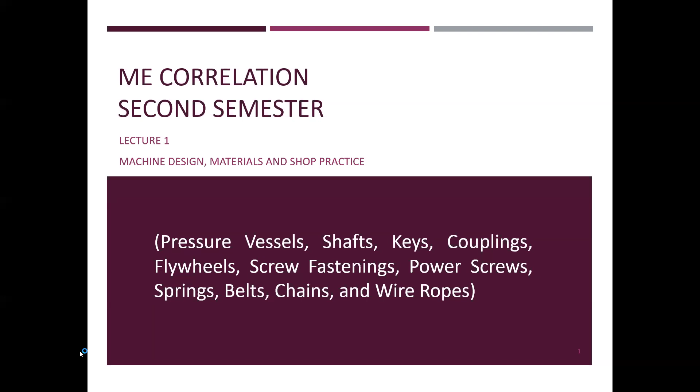So let's discuss pressure vessels or cylinders. We have thin wall pressure vessel or thin wall cylinder, which is one whose plate thickness is small compared to the diameter of the vessel. The ratio T over DI is equal to or less than 0.1, where T is thickness and D is diameter.

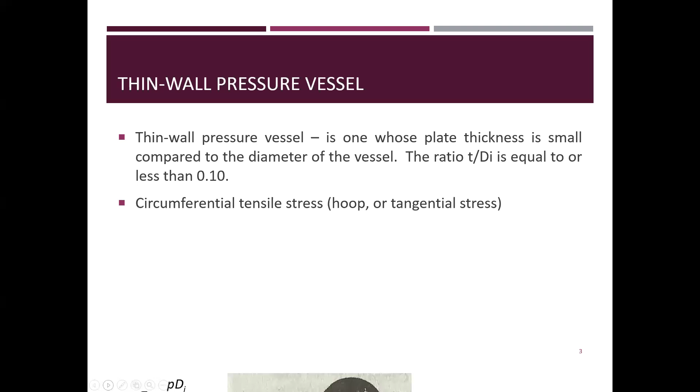So circumferential tensile stress, also called hoop or tangential stress, sigma T, is equal to PDI over 2T. That's shown in the figure.

Next is the longitudinal tensile stress. For thin wall cylinder and thin wall sphere, sigma L is equal to PDI over 4T, where sigma T is the circumferential stress in PSI, sigma L is the longitudinal stress in PSI, P is the internal pressure in PSI, DI is the internal diameter in inches, and T is the wall thickness in inches. SI units also apply.

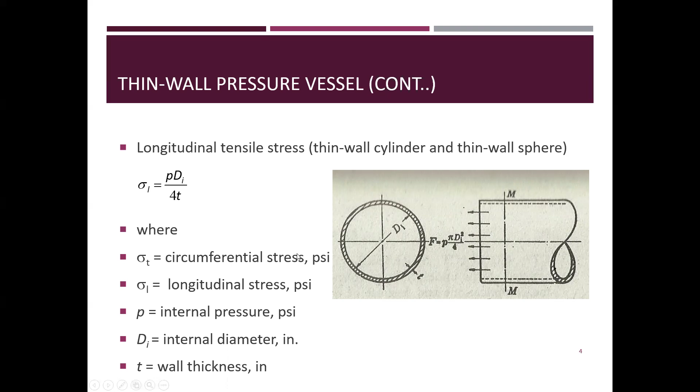Joint efficiency or relative strength, N, is equal to the minimum strength of joint divided by the strength of solid plate. Then, considering joint efficiency, the circumferential tensile stress now, sigma T, is equal to PDI over 2TN, and longitudinal tensile stress, sigma L, is equal to PDI over 4TN.

Factor of safety on specified material strength is taken as 5.

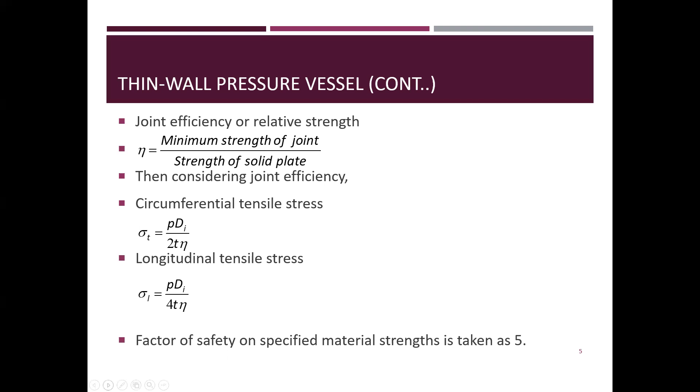Example number 1: Design a vertical steel cylindrical water tank 30 meters in diameter and 45 meters high. Consider the pressure variation in the water to follow a straight line from the edge of the top to the center of the bottom, and the allowable stress of the steel plate is 120 megapascal. Without reinforcing angle bars and rod, find the thickness of the steel plate.

ME Board, October 2006. So the solution is P is equal to gamma times H. Let's get the pressure at the bottom: P is equal to gamma H, which is 9.81 kilonewton per cubic meter times 45 meters, giving 441.45 kilopascal. So we have the pressure.

So sigma T is equal to PDI over 2T, which is 120,000 equals 441.45 times 30 over 2T. So the thickness is 0.055 meters. That's the thickness of the wall of the cylinder.

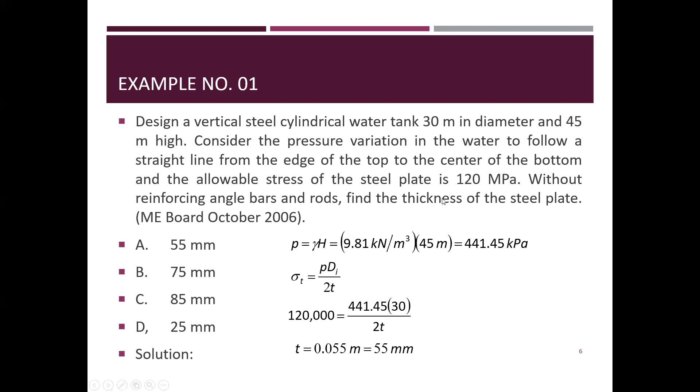Now, thick wall cylinder is one whose plate thickness is large compared to the diameter of the vessel. The ratio T over DI is greater than 0.1.

Here are the equations. Using Lame's formula, the tangential stress sigma T is equal to PI times R sub I squared minus P sub O times R sub O squared, plus R sub I squared times R sub O squared times (PI minus PO) over R squared, all divided by R sub O squared minus R sub I squared.

So the radial stress sigma R is equal to PI times R sub I squared minus P sub O times R sub O squared, minus R sub I squared times R sub O squared times (PI minus PO) over R squared, all divided by R sub O squared minus R sub I squared.

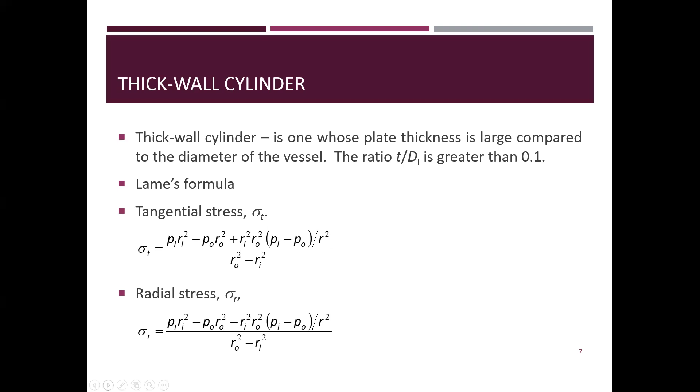Where R sub O is the outer radius of the cylinder in inches, R sub I is the inner radius of the cylinder in inches, PI and PO are the internal and external pressure respectively in PSI, T is the wall thickness equal to R sub O minus R sub I, sigma T is the tangential stress in PSI, and sigma R is the radial stress in PSI. SI units also apply.

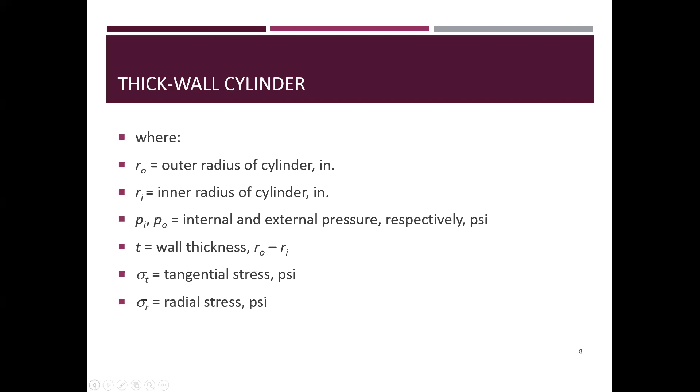Now, the maximum tangential stress at the inside: sigma T is equal to P sub I times (R sub O squared plus R sub I squared) minus 2 P sub O times R sub O squared, over R sub O squared minus R sub I squared.

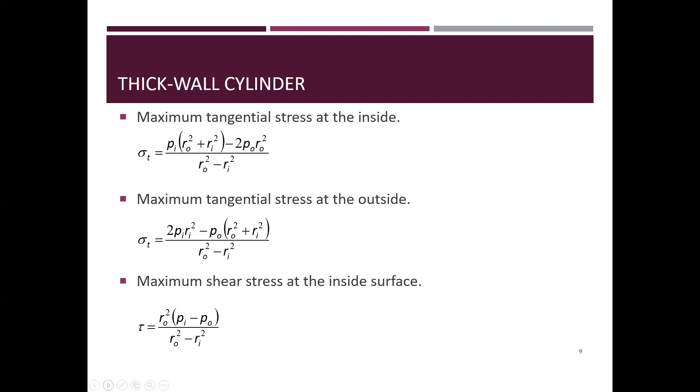Maximum tangential stress at the outside: sigma T is equal to 2 P sub I times R sub I squared minus P sub O times (R sub O squared plus R sub I squared), over R sub O squared minus R sub I squared. And the maximum shear stress at the inside surface, tau, is equal to R sub O squared times (P sub I minus P sub O) over R sub O squared minus R sub I squared.

Tangential and radial stress with zero value for the external pressure. Sigma T is equal to P sub I R sub I squared over R sub O squared minus R sub I squared, plus 1 plus R sub O squared over R squared. Sigma R is equal to P sub I R sub I squared over R sub O squared minus R sub I squared, plus 1 minus R sub O squared over R squared.

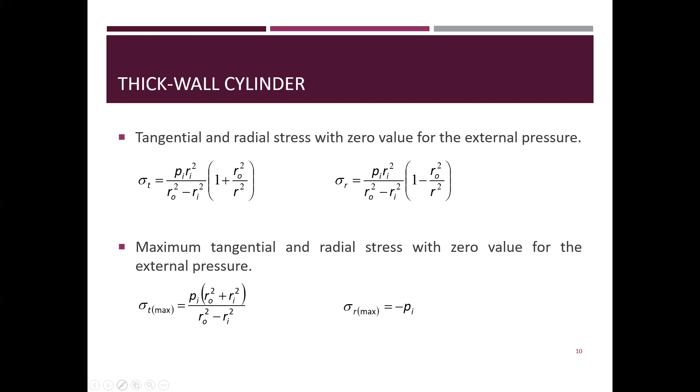For the maximum tangential stress and radial stress with zero value for the external pressure, sigma T maximum is P sub I times R sub O squared plus R sub I squared over R sub O squared minus R sub I squared. The sigma R maximum is negative P sub I. So these are the symbols.

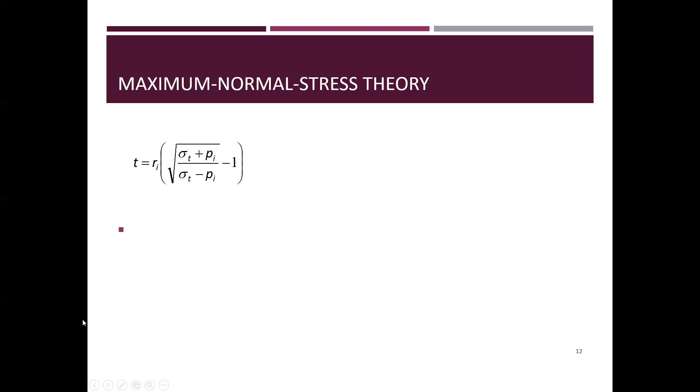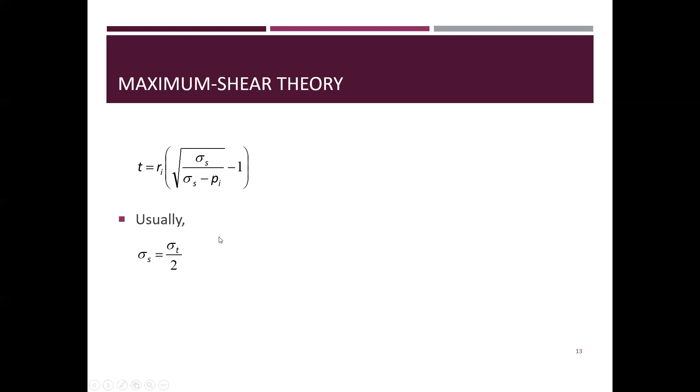Maximum shear theory, T is equal to R sub I times the square root of sigma S over sigma S minus P sub I, then minus 1, outside the square root. Usually, sigma S is equal to sigma T over 2. The application of this was probably discussed in your machine design course as well.

Maximum strain theory. Here comes Birnie's equation for open-end cylinder. We're just reviewing this, the complete discussion is of course in machine design. T is equal to R sub I times the square root of sigma T plus 1 minus mu times P sub I over sigma T minus 1 plus mu P sub I, then minus 1.

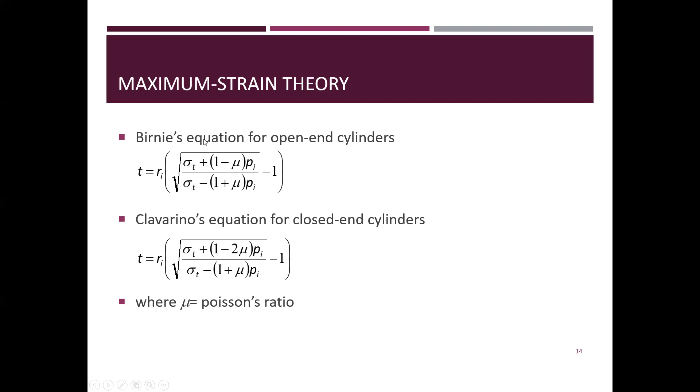Clavarino's equation for closed-end cylinder. T is equal to R sub I times the square root of sigma T plus 1 minus 2 mu P sub I over sigma T minus 1 plus mu times P sub I, minus 1. Then minus 1. Mu is the Poisson's ratio. Remember this equation, okay.

Maximum energy of distortion theory, or the octahedral shear stress theory. T is equal to R sub I times the square root of sigma T over sigma T minus the square root of 3 times P sub I. This P sub I is outside the square root. Then minus 1, which is also outside the square root, not inside it.

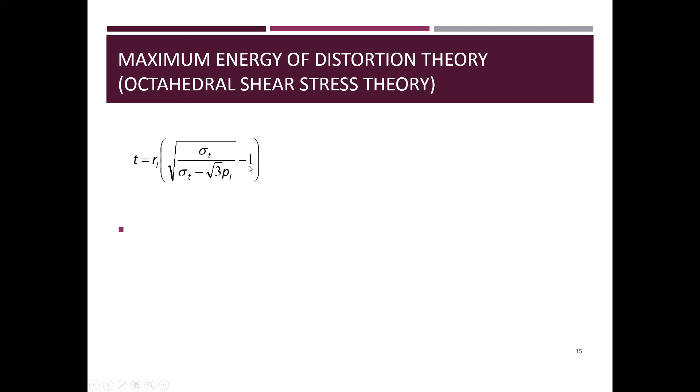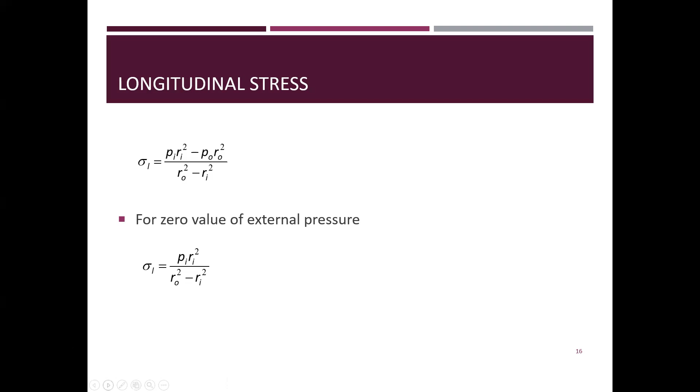Example number 2. The working cylinder of a hydraulic system is acted upon by a hydraulic pressure of 370 psi, while the maximum load on the piston is 5,500 pounds. If the allowable tensile stress is 2,000 psi, what is the required wall thickness of the cylinder? Solution: F is equal to P over A.

Pressure times area gives you the force. So, 5,500 is equal to 370 times pi over 4 D squared. We don't have the diameter, so we solve for it. D is equal to 4.35 inches.

Assuming a thick wall cylinder, then we check if it's valid. T is equal to D over 2 times, for steel, right, steel, for this hydraulic system, D over 2 times the square root of sigma T plus P sub I over sigma T minus P sub I, then minus 1. T is equal to 4.35 over 2 times the square root of 2,000 plus 370 over 2,000 minus 370, then minus 1, which equals 0.448.

To check, T over D is 0.448 over 4.35, which is 0.103. That's greater than 0.1, so it's a thick cylinder. A thin cylinder is an approximation of a thick cylinder with T over D less than 0.1. Using the thin cylinder equation, this yields 0.402 inch with T over D of 0.092, which is less than 0.1. But this is valid only if the thick cylinder equation's T over D is less than 0.1.

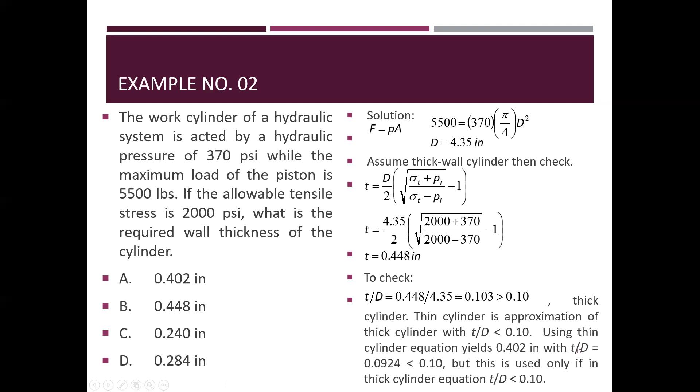So next is shafting. Shafts. Shafts subjected to twisting moment only. T over J is equal to tau over R, where T is equal to twisting moment or torque acting upon the shaft, J is the polar moment of inertia of the shaft about the axis of rotation, tau is the torsional shear stress, and R is equal to D over 2, where D is the diameter of the shaft. This is just for review; the detailed discussion will be next time.

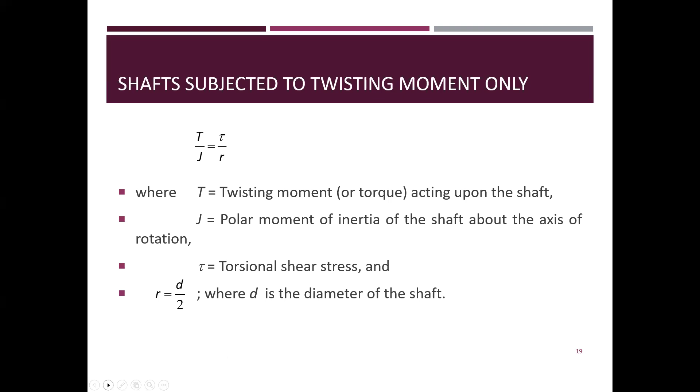For solid shaft, J is equal to pi over 32 times D exponent 4. For hollow shaft, J is equal to pi over 32 times D sub O exponent 4 minus D sub I exponent 4. For solid shaft, T is equal to pi over 16 times tau times D cube. For hollow shaft, T is equal to pi over 16 times tau times D sub O exponent 4 minus D sub I exponent 4, over D sub O.

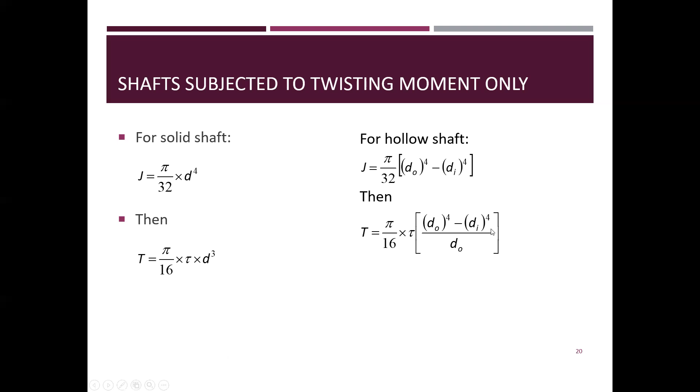Example number 3: A 4-inch shaft with a 2-inch hole through it has a weight 25% less than a solid 4-inch shaft. But its strength is decreased by what approximate percentage? So the percentage reduction is T sub S minus T sub hollow, over T sub S, multiplied by 100% since the question asks for percentage.

S subscript S is for solid, H is for hollow. So T sub S is equal to tau pi D cube over 16. T sub H is equal to tau pi times D sub O exponent 4 minus D sub I exponent 4, over 16 D sub O. Then we equate that.

So the formula for percent reduction: substitute D cube, cancel the tau and the pi and the 16. So D cube minus D sub O exponent 4 minus D sub I exponent 4 over D sub O, all over D cube, times 100%. This equals 1 minus D sub O exponent 4 minus D sub I exponent 4 over D sub O D cube, times 100%. Percent reduction is, substitute now the values, 1 minus 4 exponent 4.

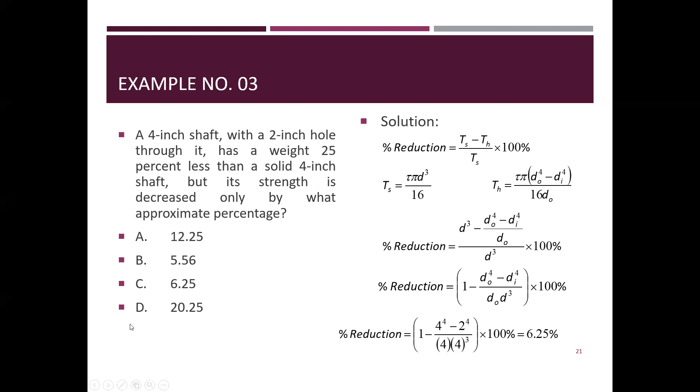Why the 1? Because 1 cube is 1. 1 minus 4 exponent 4 minus 2 exponent 4, over 4 times 4 cube, times 100%, equals 6.25%. So the answer is letter C. You may encounter problems like this on the board exam.

Shaft subjected to bending moment only. M over I is equal to sigma B over Y. This is the general equation, where M is the bending moment, I is the moment of inertia of the cross-sectional area of the shaft about the axis of rotation.

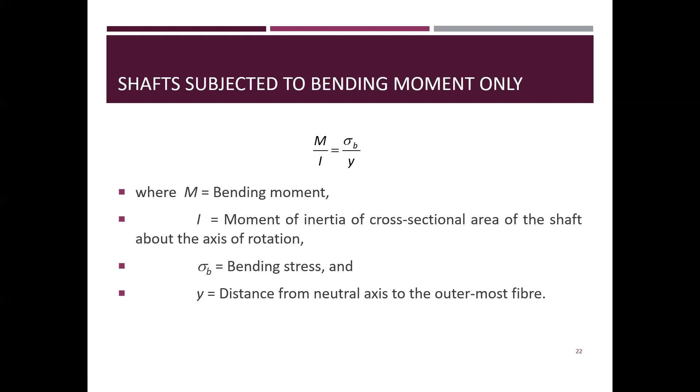Sigma B is the bending stress, and Y is the distance from the neutral axis to the outermost fiber. For a round shaft, I is equal to pi over 64 times D exponent 4, the moment of inertia, and Y is equal to D over 2. Then M is equal to pi over 32 times sigma B times D cube. For a hollow shaft, I is equal to pi over 64 times D sub O exponent 4 minus D sub I exponent 4. Then M is equal to pi over 16 times sigma B times D sub O exponent 4 minus D sub I exponent 4, over D sub O.

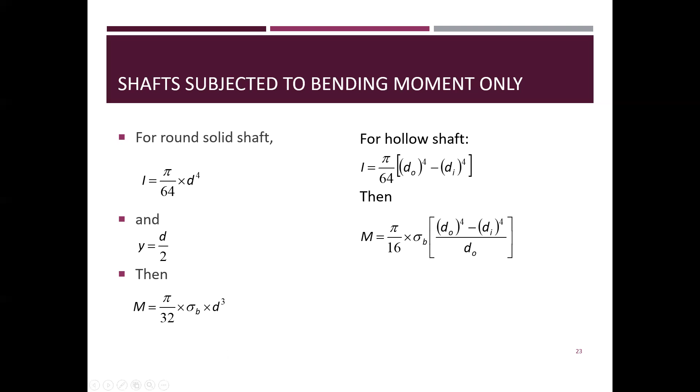Now for a shaft subjected to combined twisting moment and bending moment, we use the maximum shear stress theory, or Guest's theory. It is used for ductile materials such as mild steel. There is also the maximum normal stress theory, or Rankine theory, used for brittle materials such as cast iron.

So the maximum shear theory: tau max is equal to 1/2 of the square root of sigma B squared plus 4 tau squared. Tau max is 1/2 of the square root of 32M over pi D cube squared plus 4 times 16T over pi D cube squared, which simplifies to 16 over pi D cube times the square root of M squared plus T squared.

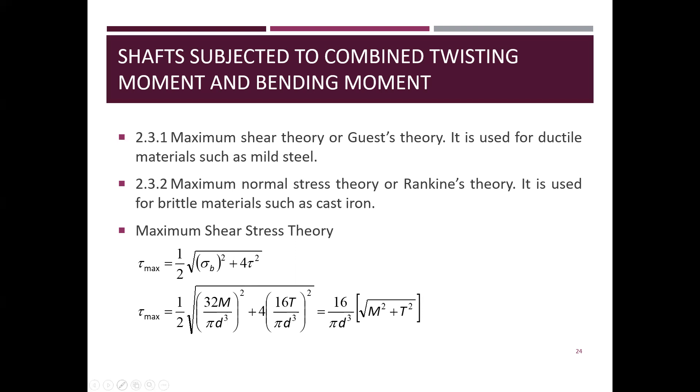So this becomes pi over 16 times tau max times D cube is equal to the square root of M squared plus T squared. This expression is called the equivalent twisting moment, denoted by T sub E.

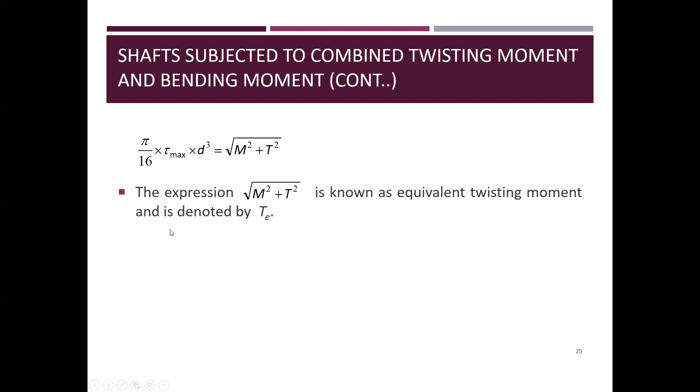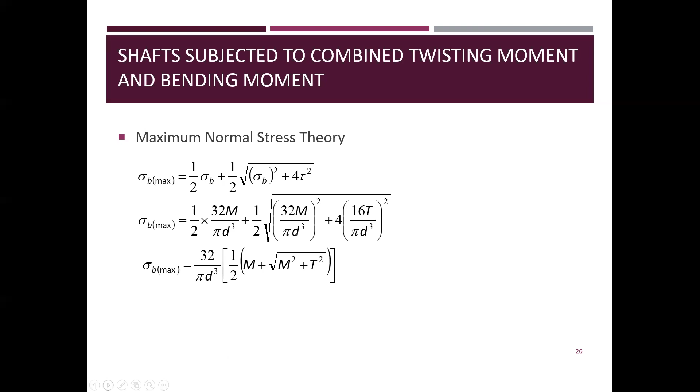Or 32 over pi d cubed times 1 half of m plus the square root of m squared plus t squared. So pi over 32 times sigma b max times d cube is 1 half of m plus the square root of m squared plus t squared.

The term 1 half m plus the square root of m squared plus t squared is known as the equivalent bending moment, denoted by m sub e.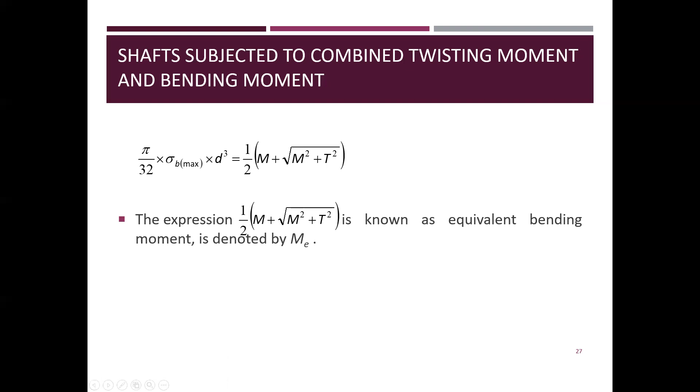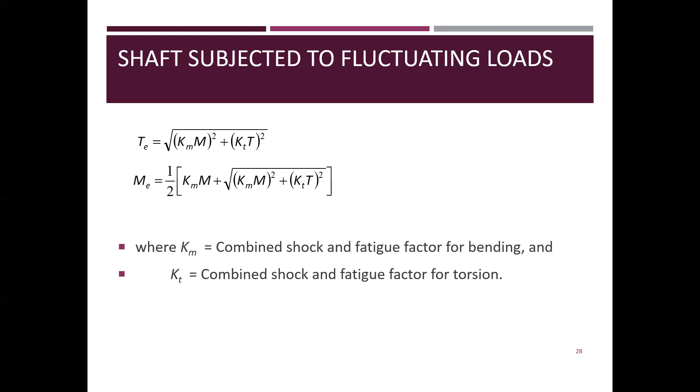Now, shaft subjected to fluctuating loads. TE is equal to the square root of Km M squared plus Kt T squared. Look at this formula: M is equal to 1 half of Km M plus the square root of m squared plus KTT squared, where Km is the combined shock and fatigue load factor for bending, and KT is the combined shock and fatigue factor for torsion.

From the design of machine elements by Faires: sigma es is equal to sigma ns over sigma ys, sigma ms plus kfs, sigma as over sf for torsion. Sigma E is equal to sigma n over sigma y, sigma m plus k sub f, sigma a over sf for bending.

Where sigma is the symbol for stress, and sf is the size factor or load factors. There are many factors there, already discussed before, right? That's the design, as in Faires.

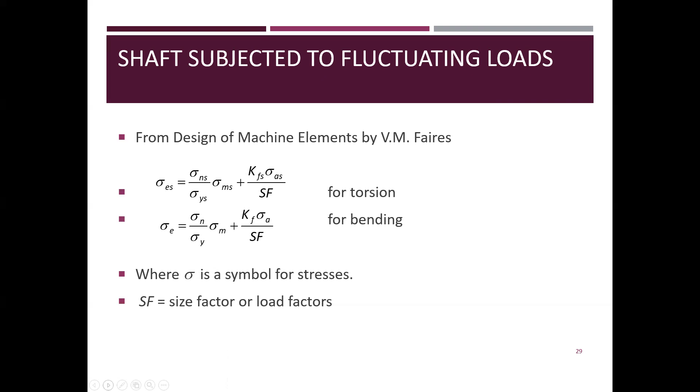Go back to that. Then the maximum shear theory: 1 over n is equal to sigma E over sigma n squared plus sigma ES over 0.5 sigma n squared, then square root or exponent 1 half. Von Mises-Hencky theory of failure, or octahedral shear theory, is 1 over n is equal to sigma E over sigma n squared plus sigma ES over 0.577 sigma n squared, exponent 1 half.

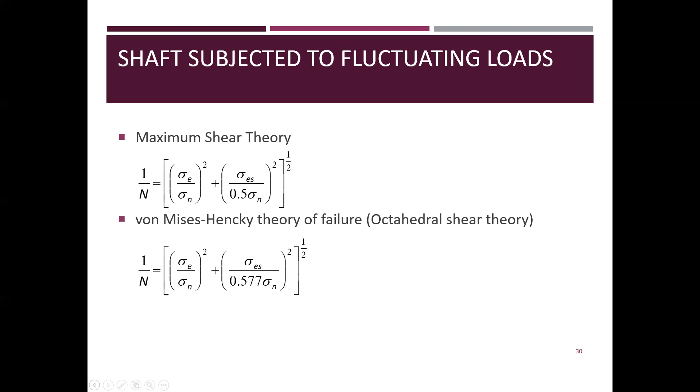Now, shaft subjected to axial load in addition to combined torsion and bending loads. Resultant stress: sigma 1 is equal to M times Y over I plus F over A. Remember that.

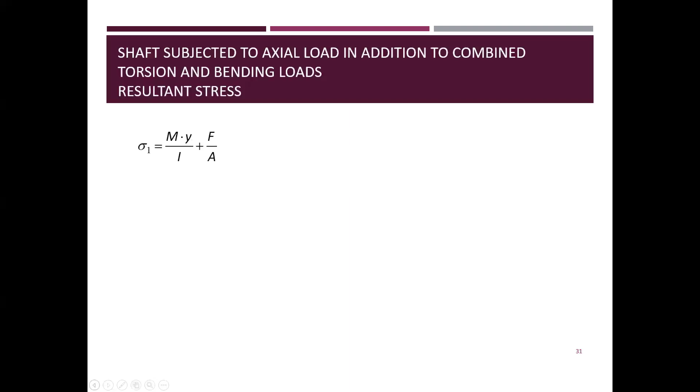That was also discussed in your machine design. Just a reminder: design of shaft on the basis of rigidity. That's the twist or bending. Torsional rigidity, theta is equal to TL over GJ.

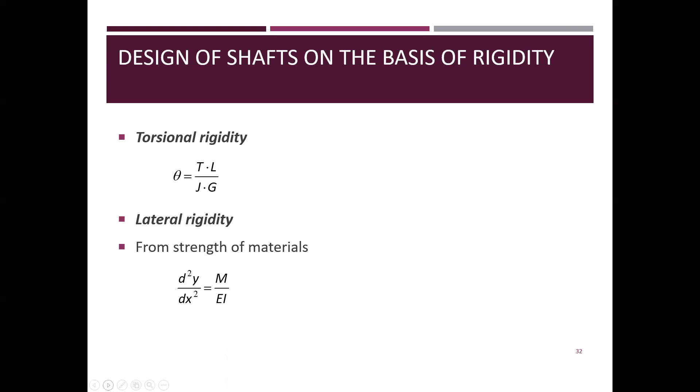Lateral rigidity is bending. From strength of materials, the second derivative of y with respect to x equals m over EI. Strength of materials, or mechanics of deformable bodies, that's the topic of beams, long discussion there, go check that. Recall it, if you remember, if you weren't absent.

Example number 4. A steel shaft 1.4375 inches in diameter transmits 40 horsepower at 1,400 RPM. Assuming a modulus of rigidity of 12 times 10 exponent 6 psi, find the torsional deflection of the shaft in degrees per foot of length. P, the power, is 2 pi Tn, so 40 times 33,000 is equal to 2 pi T times 1,400. Why? Because 40 is horsepower.

33,000 foot-pounds per horsepower-minute, and n in RPM is per minute, so 1,400 RPM. So the torque becomes in foot-pounds. Torque is equal to 150 foot-pounds, or 1,800 inch-pounds.

So theta is equal to TL over GJ. Since it says per foot length, L is 12 inches. So this becomes 1,800 inch-pounds times 12 inches, over pi over 32 times 1.4375 raised to the 4th power, divided by 12 times 10 exponent 6, times 180 degrees per pi radian.

This becomes 0.246 degrees. Theta is in degrees, but in the formula you compute it in radians, so multiply by 180 over pi to convert to degrees.

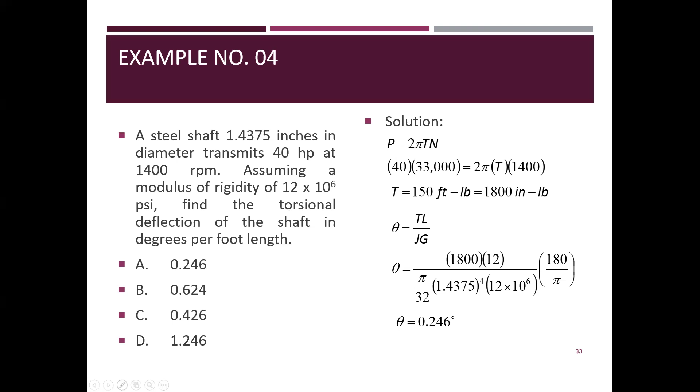Shaft design by PSME Code and Machinery's Handbook.

So, in the PSME Code, these are the allowable stresses: 27.6 megapascal or 4,000 PSI for main power transmitting shaft, mentioned already. 41.4 megapascal or 6,000 PSI for line shaft carrying pulleys - that's when it has pulleys attached, called a line shaft. The power transmitting shaft comes simply from the source. 58.6 megapascal or 8,500 PSI for small, short shaft, counter shaft, etc. - these are the spindles.

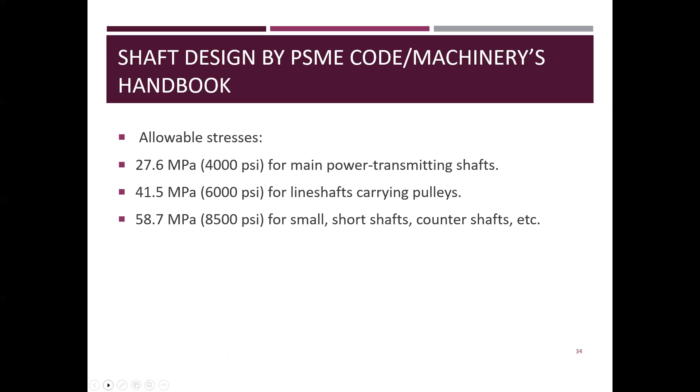IP units, so IP or English units. The torque is 63,000 times P over N. This is in inch-pounds.

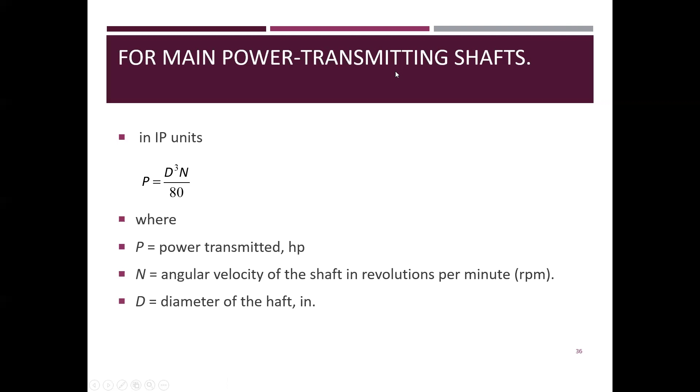In IP units, P is equal to D cubed times N over 80, where P is the power transmitted - this is for main power transmitting shaft. N is the angular velocity of the shaft in revolutions per minute, D is the diameter of the shaft in inches. That's the constant: inches, RPM, divided by 80, gives horsepower, for main power transmitting shaft.

Sample number 5. What would be the diameter of the main power transmitting shaft to transmit 150 kilowatt at 500 RPM? Solution: by PSME code, for main power transmission shaft, P is equal to D cube times N over 80. But P is 150 kilowatts, or 201.07 horsepower - divide by 0.746 to convert to horsepower. So, 201.07 is D cube times 500 over 80, giving diameter equals 3.18 inches.

Then, converting to SI units, this becomes 80.77 mm. So the answer is letter C.

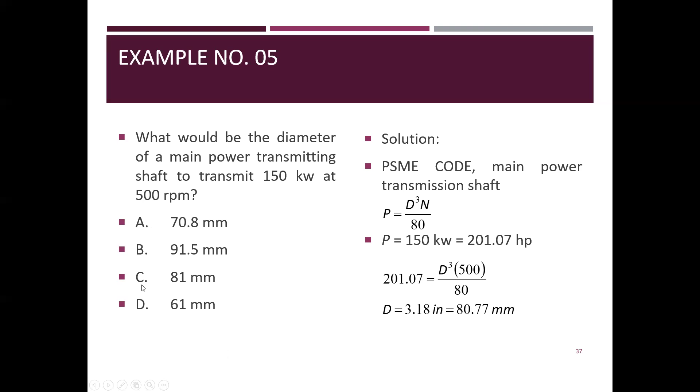For line shaft carrying pulleys, in IP units, P is equal to D cube N over 53.5. So, example number 6.

Find the diameter of a steel line shaft to transmit 10 horsepower at 150 RPM with a torsional deflection not exceeding 0.08 degrees per foot of length. So may two conditions here.

Solution. Per PSME code, line shaft P is equal to D cube N over 53.5, equal to D cube times 150 over 53.5. So D is equal to 1.53 inches. But that's not final yet.

Never mind the 0.08 since there's no other given input. Theta is TL over JG. There's no length given. But there is no length L, so this answer stands, 1.53.

So, in IP units for a small, short shaft. Let's also check if it fits within 0.08.

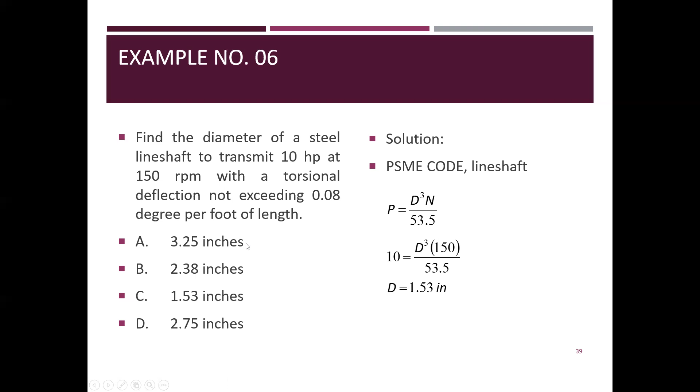In IP units, P is equal to D cube N over 38 for a small shaft, a short shaft. A short 61 mm shaft transmits 120 horsepower. Compute the linear speed of a pulley 55 centimeters mounted on the shaft.

This is from the ME board, October 1995. Per PSME code, short shaft, P is equal to D cube N over 38. So 120 is equal to 61 over 25.4, cubed, times N over 38. So N is equal to 329.2 RPM.

Now find the velocity. Pi times the diameter of the pulley times N is pi times 0.55 meter times 3.281 feet per meter times 329.2 RPM. So the speed is 1866 feet per minute.

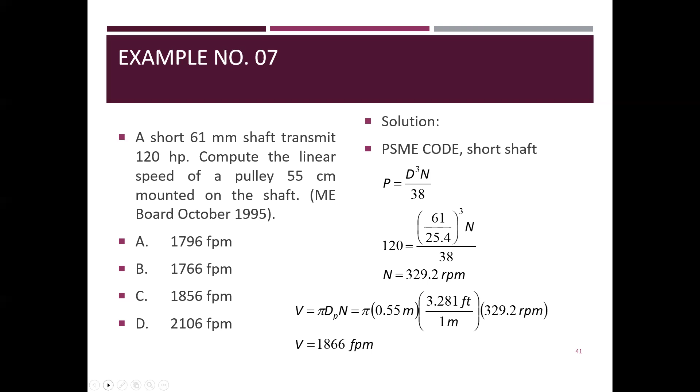Shaft design by Machinery's Handbook. Number 1, torsional deflection. According to some authorities, the allowable twist in steel transmission shafting should not exceed 0.08 degrees per foot length of the shaft.

The diameter at the ends of a shaft - since we're in English units, let's convert to English. So the diameter in inches of the shaft that will permit a maximum angular deflection of 0.08 degree per foot of length for a given torque T in inch-pounds or for a given horsepower P can be determined from the formula.

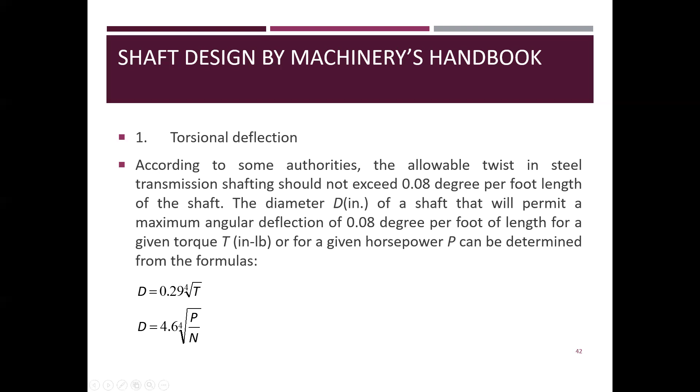So D is equal to 0.29 times the fourth root of T, torque. Or D is equal to 4.6 times the fourth root of P over N. Sometimes you'll encounter this formula again.

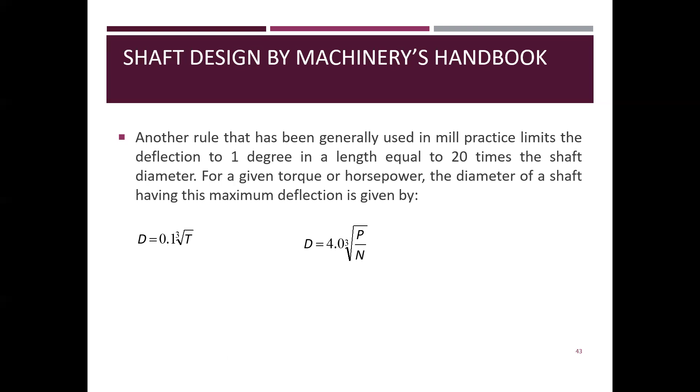Another rule that has been generally used in practice limits the deflection to 1 degree in a length equal to 20 times the shaft diameter. So for a given torque or horsepower, the diameter of shaft having this maximum deflection is given by D is equal to 0.1 times the cube root of T, or D is equal to 4.0 times the cube root of P over N.

Sample number 8. Compute the diameter in inches of a SAE 1030 steel shaft to transmit 12 horsepower at 120 RPM with torsional deflection below 0.08 degree per foot length as required. This is ME board October 2002 and ME board April 2002.

Solution from Machinery's Handbook. Maximum angular deflection is 0.08 degree per foot length. So D is equal to 4.6 times the fourth root of P over N, or 4.6 times the fourth root of 12 over 120, which is 2.59 inches, or 2 and 5/8, that is 2.625.

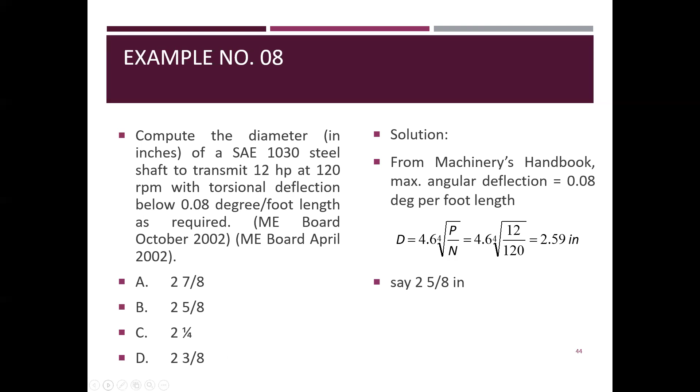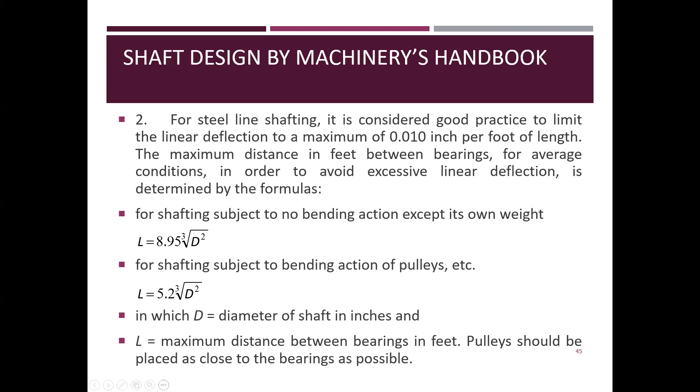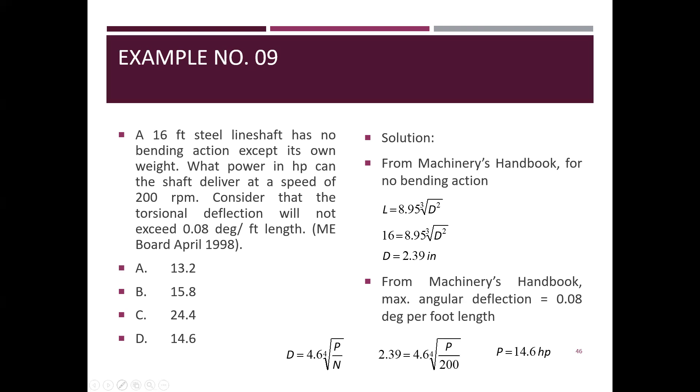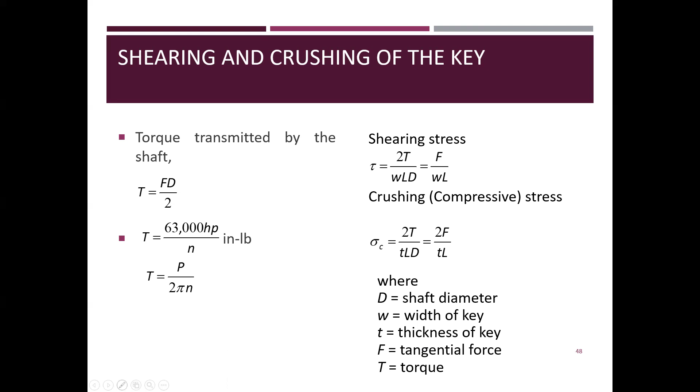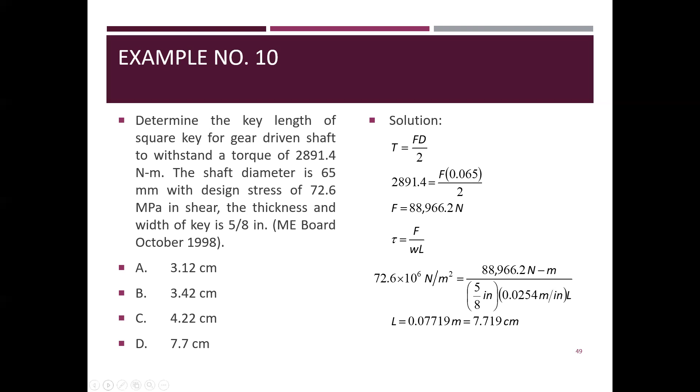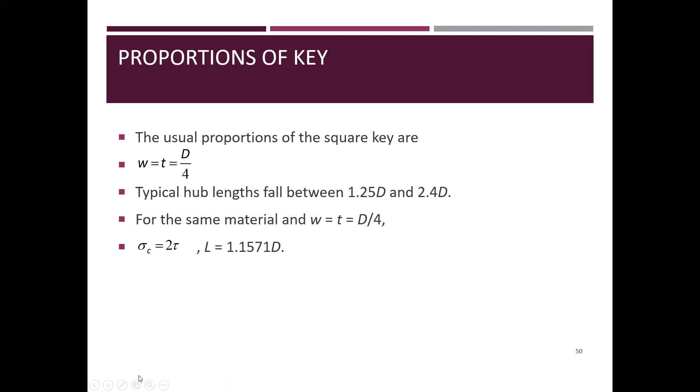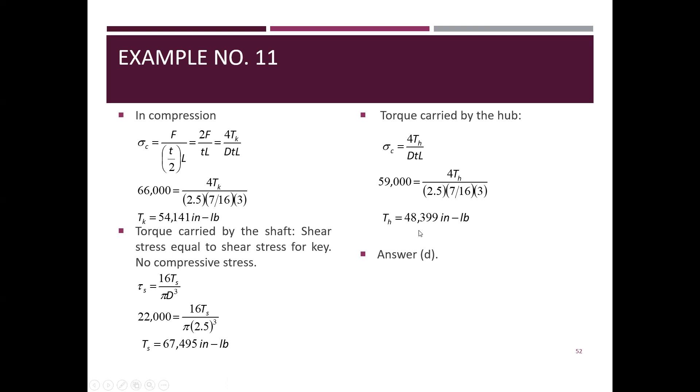Torque carried by the hub. Sigma is equal to 4TH over DTL. 59,000 equals 4TH over 2.5 over 7/16 over 3, so TH is equal to 48,399 inch pounds. That's the smallest value, so that's your answer, letter D.